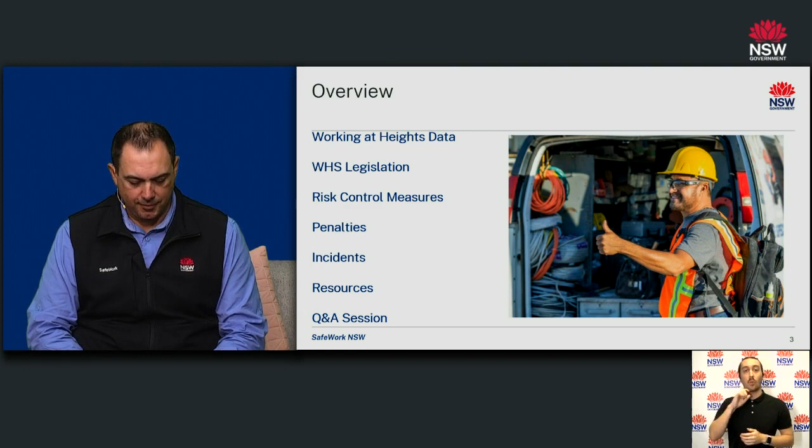Between 2017 and 2021, 38 people have lost their lives where falls from heights were the main contributing factor. And the average falls from heights construction claims cost is approximately 3 times higher than the average construction claims cost.

This continues to be a priority for SafeWork New South Wales. We recently launched our own Working at Heights in Construction compliance program. This is currently running over a 12-month period that includes site visits, campaigns, and education.

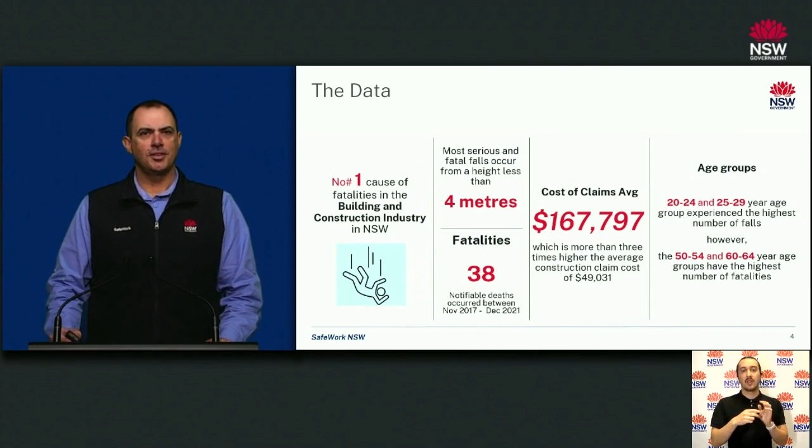At a national level, the heads of workplace safety authorities for Australia and New Zealand have recently agreed to establish a working group to tackle the specific issue of falls in the construction sector. Hopefully in the near future, we will see a coordinated national approach in addressing this issue.

Now, let's have a look at what your duties are as a PCBU. A PCBU is a person conducting a business or undertaking and is the legal term we use for a business. The WHS regulations detail the PCBU duties in Part 3.1 for managing risks to health and safety, requiring the PCBU to identify the hazards, manage the risk to health and safety by firstly eliminating the risk or by using the hierarchy of control, the ongoing maintenance of controls, and the reviewing of the implemented control measures.

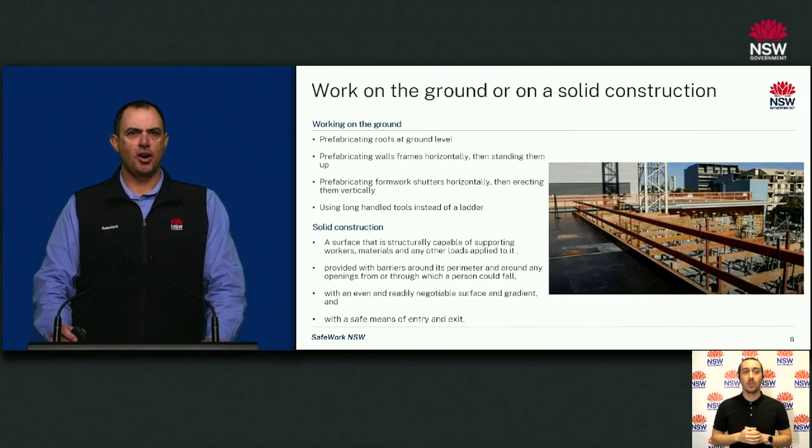The use of fall prevention devices is the most effective means of managing the risk of falls after elimination. It prevents a person from falling from an open edge or penetration with the use of a physical barrier. In addition, the use of a fall prevention device increases site productivity whilst reducing the risk to workers as opposed to using a fall arrest system.

So what are the things you need to assess before entering a work area with a risk of falls? Firstly, you should identify the weight-bearing capability of the work area in holding persons or materials. For example, a roof may be made of a brittle material such as asbestos or polycarbonate that may break under the weight of a person, which can cause a falls risk.

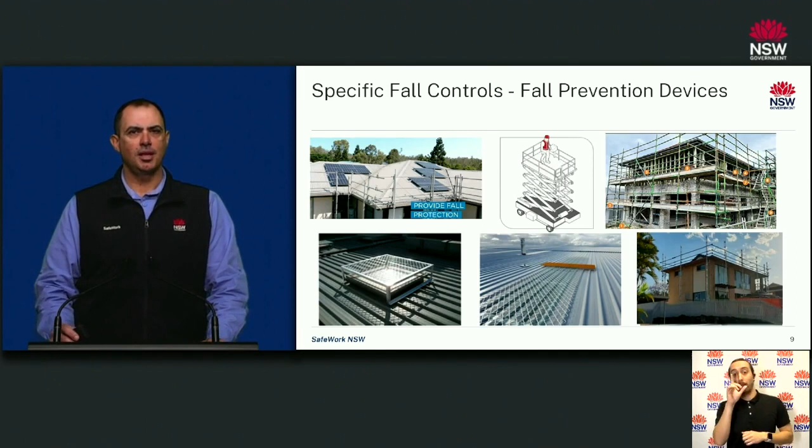Secondly, you would need to identify if there are open edges, voids or penetrations where persons may fall that will require physical barriers such as temporary guardrails and penetration covers. And thirdly, consider the activity to be performed, the location and the accessibility of the work site to determine if you can utilise other forms of fall prevention devices such as scaffolding or elevated work platforms to complete the task safely.

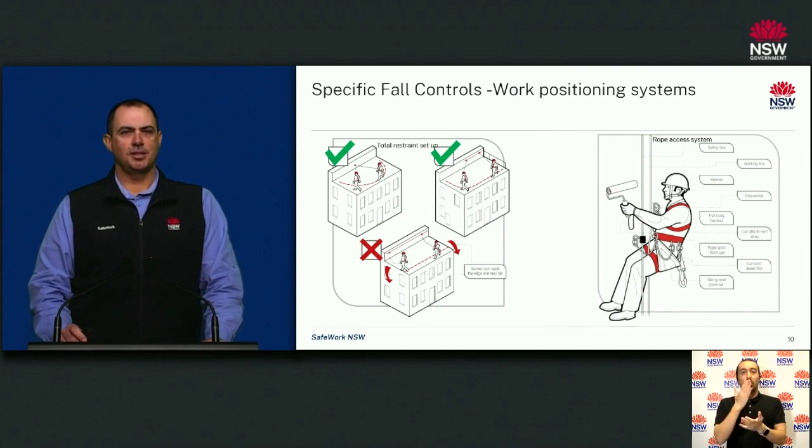The last order of control prescribed in the regulation to manage the risk of falls is the use of a fall arrest system, such as a harness. This system normally requires multiple anchor points to cover the working area, or for the user to install and connect to the anchors as they traverse the entire work area. These systems rely heavily on worker behaviour to ensure effectiveness and often fail due to incorrect setup or application.

So what does a SafeWork inspector look for when on a site that is utilising a fall arrest system? The PCBU must demonstrate that they have considered all other options, such as the use of a fall prevention device, before deciding on the use of a fall arrest system to determine compliance with the legislation. They must have a site emergency plan that has been tested. Reliance on calling the rescue service or the ambulance as a control measure is not sufficient.

They must have a safe work method statement, equipment register and associated anchor plans, and have records to demonstrate training and proper instruction being provided to the workers in relation to the use of these systems.

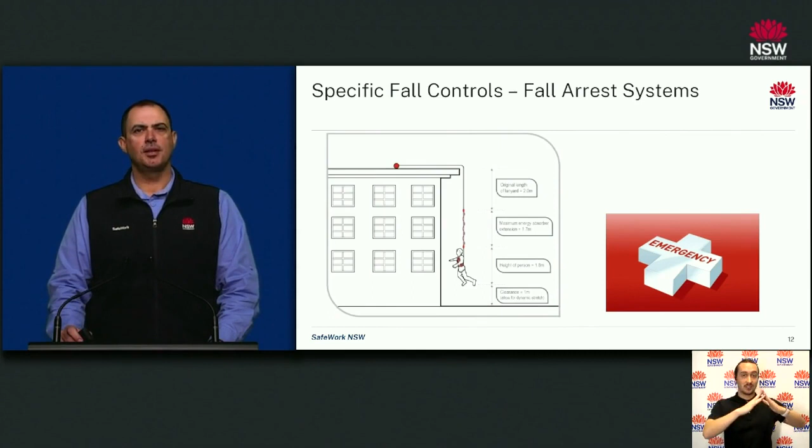SafeWork New South Wales is taking a zero-tolerance approach to PCBUs who put workers' safety at risk. There are existing on-the-spot penalties that relate to falls ranging from $2,160 to $3,600 for PCBUs and $720 for workers. A PCBU can be prosecuted with penalties up to $1.5 million.

We are now going to review a few incidents that occurred in the workplace in relation to falls. These can be found on our website. In this incident, a 28-year-old worker was installing insulation batts on the third level of a residential construction build when he fell approximately 3 metres through the stair void onto the concrete floor. He sustained serious head and spinal injury.

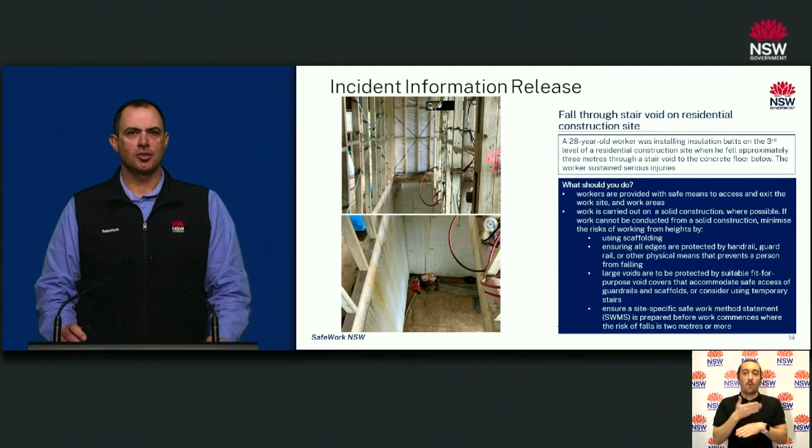So what are the risk control measures that should be in place? Work to be carried out on a solid construction or use of a scaffold to prevent the person from falling. The use of fit-for-purpose void covers that accommodate safe access, and a safe work method statement that is site-specific is prepared before work commences with agreed controls to manage the falls risks.

Here we had a 43-year-old worker standing on a plank which was placed on top of an A-frame ladder on one end and on the other end resting on a scaffold. The plank was set up to raise the worker high enough to install the roof section. The worker was standing less than 2 metres on the plank when he fell backwards and suffered a serious head injury.

So what risk control measures can be used to prevent this incident from occurring? One is the provision of a work platform that is suitable for the task, such as scaffolds, elevated work platforms or scissor lift. If you are using a trestle type setup, you must ensure that you have at least 2 planks with guardrails installed to prevent falls, and workers will be provided with a safe way to access and exit the work area.

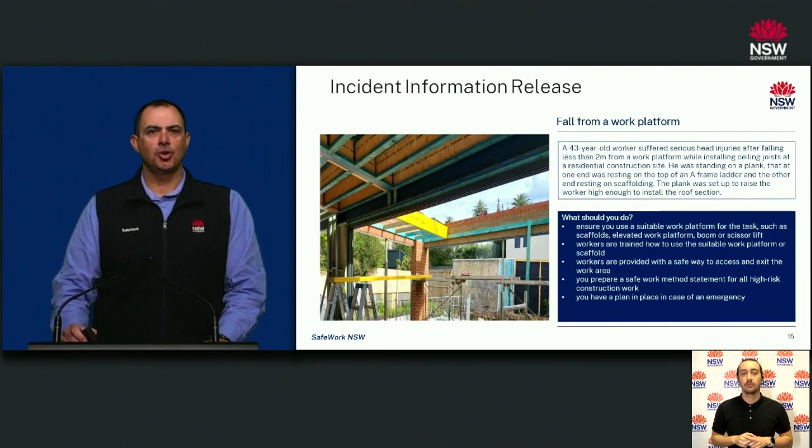In this case, a 52-year-old worker tragically lost his life when he was cleaning the roof gutter and fell 3 metres through a roof onto a concrete pavement at a school. This occurred when he stepped onto a polycarbonate roof sheeting.

This tragedy could have been easily avoided by assessing the work area to ensure the work surface is suitable to hold the weight of workers and associated materials, the installation of guardrails around non-trafficable areas or use of a work positioning system, and the placement of covers over non-trafficable areas.

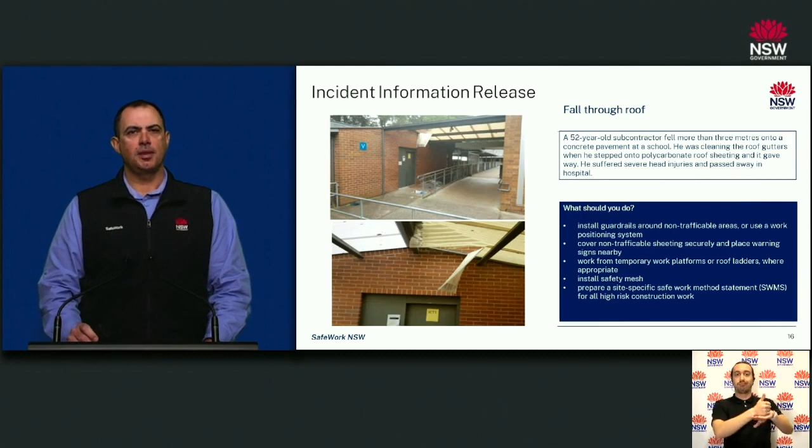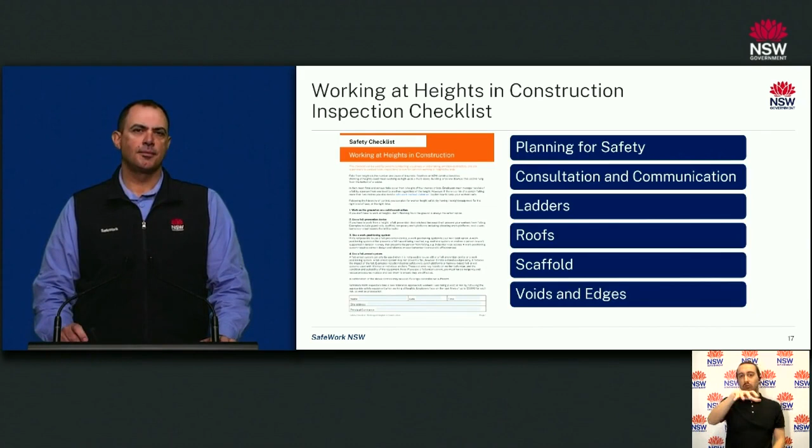We recently released a Working at Heights in Construction Inspection checklist, which is available via our SafeWork New South Wales website. This checklist covers the main areas a SafeWork New South Wales inspector would normally inspect on your site as part of the Working at Heights compliance program visit. This is a great checklist to assist you in getting your site compliant in relation to Working at Heights. I strongly encourage you to download this checklist.

I just want to share some information on other resources that are available on our website. We have a Working at Heights construction webpage, which has great resources, including our new checklist, videos, guides, and other useful information. We have a Safety Cast podcast series, which covers many construction safety related topics, including Working at Heights. We also have a Speak Up app available to download. This is an effective tool to use to report WHS concerns that you may have to us.

In addition, we provide financial assistance through our small business rebate program of $1,000 to purchase safety items to improve safety in your workplace.

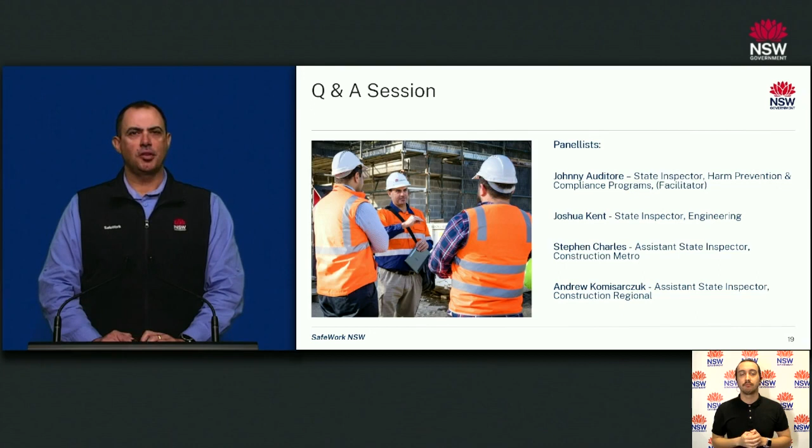Okay, so I'll start off by introducing our inspectors that are on the panel today. So first of all, we've got Joshua Kent. He's our engineering expert, in the engineering team. We've got Stephen Charles, he's Assistant State Inspector on our Metro construction team. And we've got Andrew Komisarczuk, who's our Assistant State Inspector for our regional construction team.

So welcome, guys. So first question we've got here is: what will inspectors be looking for when they attend site? Yeah, thanks, Johnny. We will be looking essentially at everything. We're even looking at amenities, but concentrating on working at heights. Obviously, we'll be looking at scaffold systems, making sure that the scaffolds are compliant, edge protection, making sure that the edge protection is in place and is erected effectively.

And another big issue, particularly for two-storey residential sites and also commercial and multi-level sites, are your voids. So we want to make sure that the voids are covered or effectively have barriers in place. We'll be looking at site security as well, and also safe work method statements.